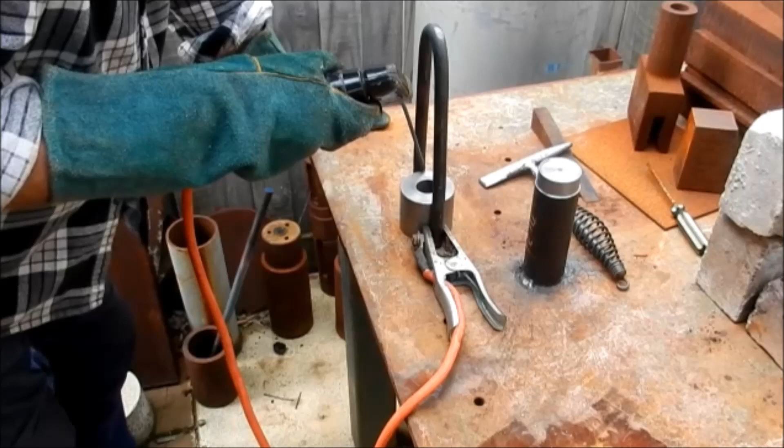Alright guys, Cam here at the Battler Workshop. I've got a little job I want to try and do over this Easter long weekend, and that is to move my Hi-Power lathe from this side of my workshop and remount it on this side of my workshop.

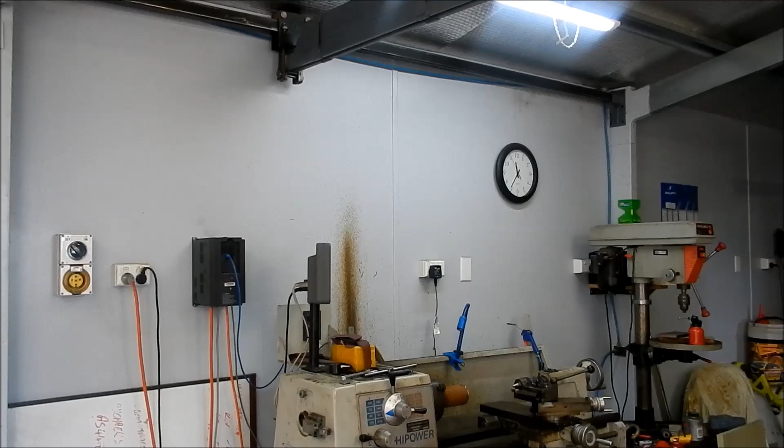The main reason for that is, in this bay I want to put a workbench, and above the workbench I want to put some cupboards. I've got a blank wall here that I can mount cupboards on, as opposed to this side where I have a window, which makes it more awkward to configure cupboards around. So it's probably going to be a lot easier to get the lathe over this side.

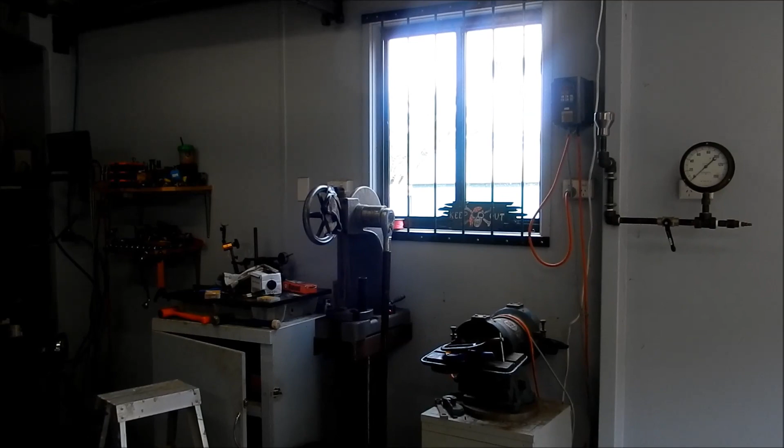And the other reason is, down the track I do want to get a bigger lathe and mount that in the middle of my workshop, and I can put a cupboard over here to share the tooling between the two lathes.

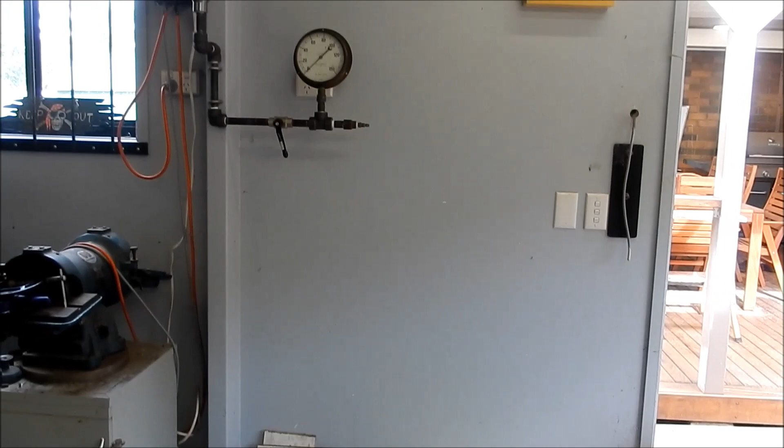So that's the task for this weekend, but before we start, I've got to make up a lifting jig to be able to lift the lathe from its bed, which is how we should always lift the lathe. Not from the headstock, not from the tailstock, we'll only damage it. We need to lift it from the bed.

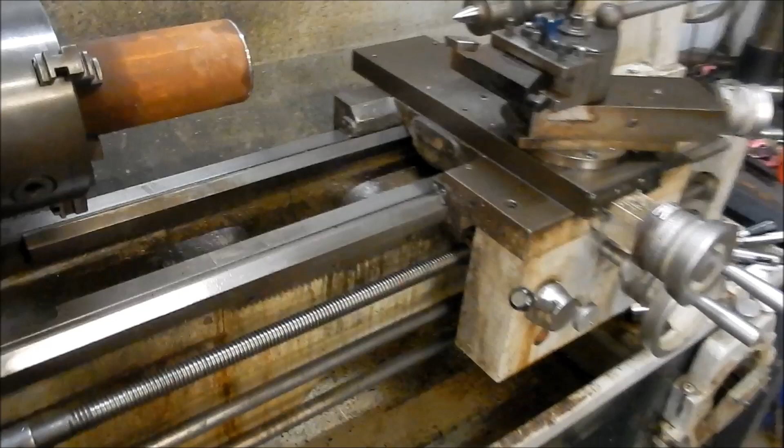I've got to put a support plate down the bottom with a studded thread and a lifting eye on top that I can use my brother's engine crane to lift from. So got a bit of stock in the lathe at the moment to make a start.

So let's have a quick look at the drawing and go over what we're going to be making up, and we'll make a start. Alright guys, we'll see you in a tick.

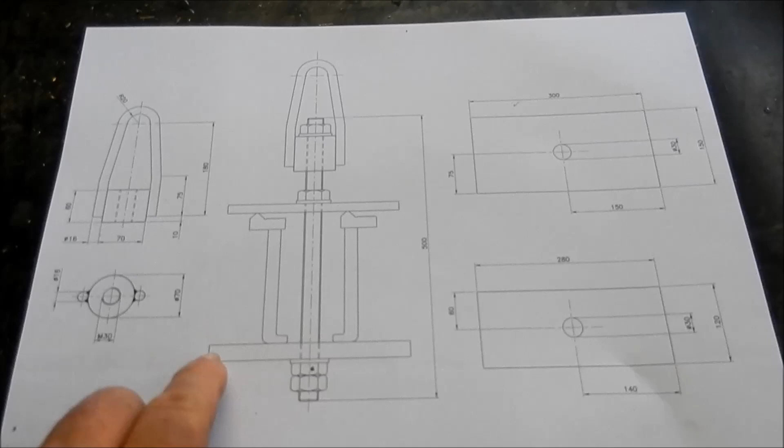And here's the drawing showing basically a general arrangement of what we're going to be doing, with the support plate underneath, a couple of nuts, jam plate on the top with a nut, and our lifting eye attached to a fabricated nut. So that's the details there of what we're going to make up.

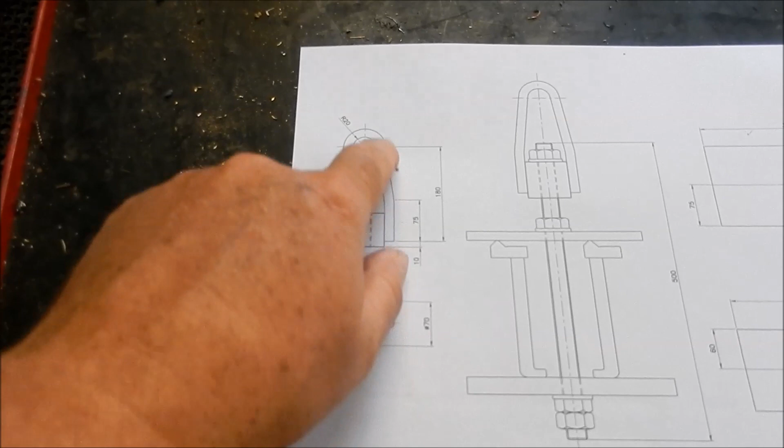So it's an M30 thread that we're going to put through that for the stud that I've got, and we'll fabricate up a lifting ring or a lifting eye with a bit of 16mm black bar, and then we've got the jam plate and the lifting plate to make up as well.

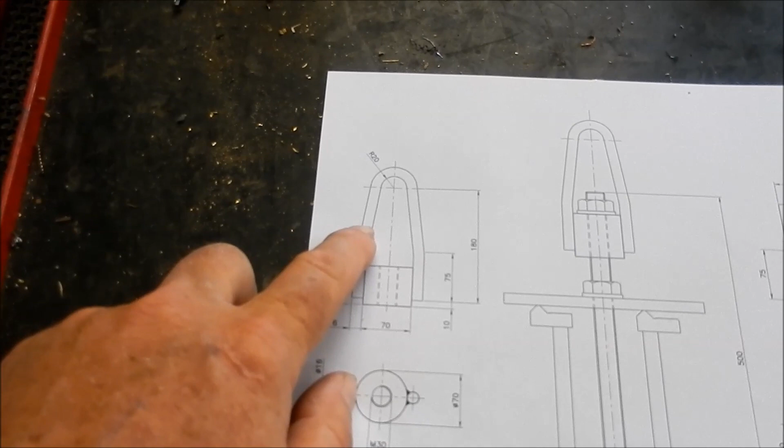The weak link in this, when I ran the numbers, will be the 16mm diameter black bar. It's a 250 megapascal tensile strength steel, and with one diameter it's capable of lifting around 5 tons. So we've got two diameters here, so that'll lift a maximum of 10 ton, and we'll put a safety factor of 5 on that. We'll bring that back to 2, so I can use that for the high power lathe,

which does weigh around about 850 kilo. And if I do get a bigger lathe, it's probably going to be around 1.5 tons to 2 ton. So I can use this jig for lifting on and off a truck or a trailer.

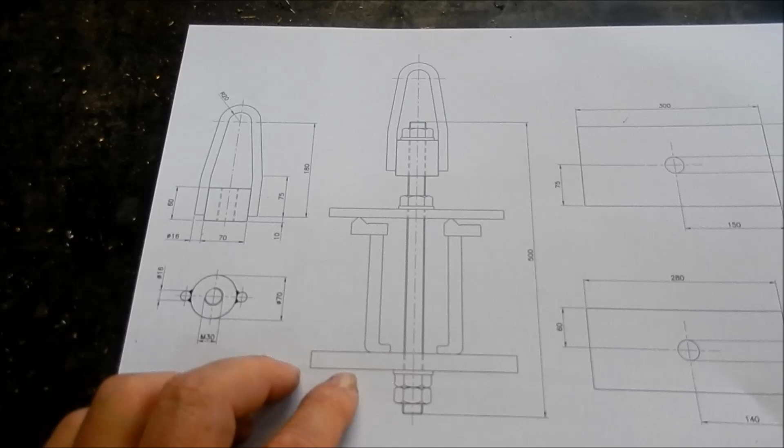Alright guys, as I said, we've got a bit of stock in the lathe at the moment, so let's make a start and we'll get into it.

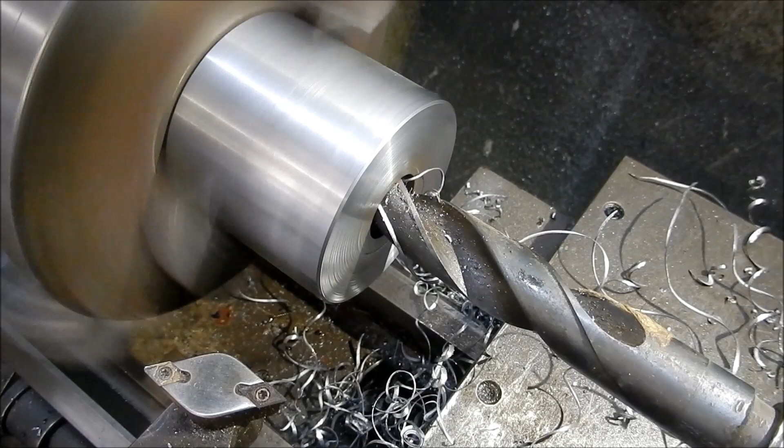Alright guys, this is one of the joys of moving. I've got everything stacked in boxes. I've got 5 of these big tubs, and whenever I want anything, I've got to try and find out which box it's in and then dig it out. For example, I'm after a drill here, and this was right down at the very bottom, so I've had to drag everything out.

I've had to do that with all my boring bars and my turning tools and all my bits and pieces, so yeah, a bit of a pain.

Anyway, we'll keep going. Like everything guys, this design's subject to change. I was looking for a fairly large threading bar I've got tucked away somewhere, and do you think I can find it? I can't find it anywhere. I've pulled everything out of boxes.

So in the absence of that, what I'm going to do is just drill a through hole that the M30 stud will fit up inside. Then I'll put a couple of nuts on either side of it, lock that in place, so it can slide up and down, and as I said, it'll be the nuts taking the load. I did want to thread this, it would have been a good little exercise, but I've got everything packed away and can't find the actual tool I'm after to do the threading. We'll go for plan B.

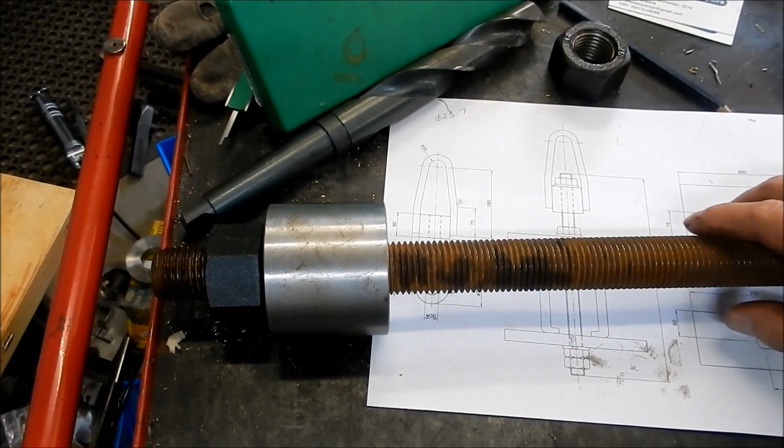Righto guys, so here's our change. I've got my stud steel here. This is an M30, high tensile. How do I know it's high tensile? Many years ago when I was working for a company, we were making up some lifting gear, and this is one of the spreader studs. When the job was finished, those got thrown out, so rather than seeing them thrown out, I grabbed them. So M30 high tensile, and that's capable of around about 40 tonne.

But I had to go into my local nuts and bolts place and buy some nuts for it, so we've got those. What we're going to do here is weld on our lifting ring, so I'll need to fabricate that up, and I'll put a jam nut on that side so it actually locks it in place. That'll do the job nicely, a little bit less work than having to worry about trying to cut the thread. It would have been a nice little exercise, but yeah, a bit hard trying to find the tools at the moment.

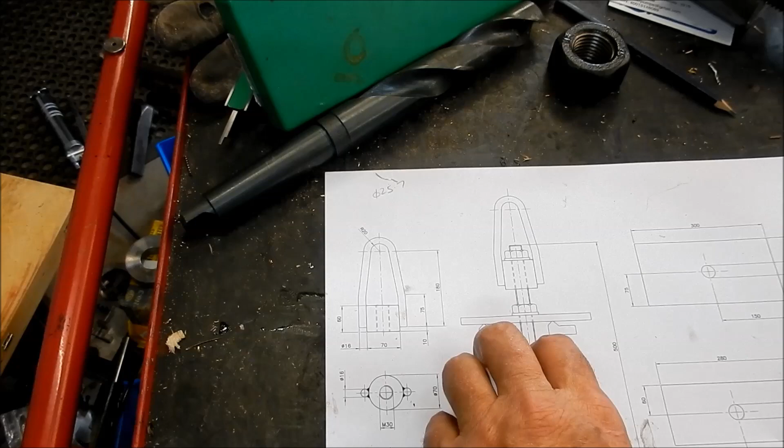All right, let's get into forming up this diameter 16 black bar, which is going to look like this, as we said. So I've got to make up some jigs to get that formed up. All right guys, we'll see you in a tick.

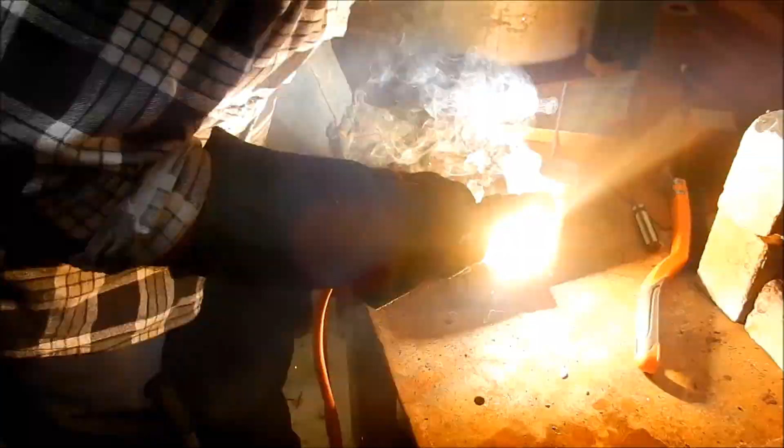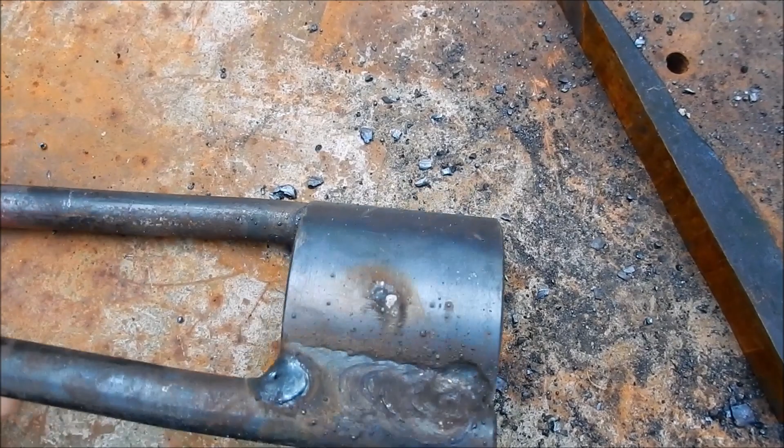Alright guys, that's finished off. I'm really pleased with how that has come up. Plenty of weld on there. Back when I was a young apprentice, I remember one of the old boilermakers telling me that for every inch of a 1/4 inch fillet, it can handle a tonne. So if I go by that rule of thumb, this shouldn't have any issues.

Alright, I'm going to get onto that with a flapper wheel and just tidy up all the spattery, slaggy bits, and we'll get these holes bored out for the plates.

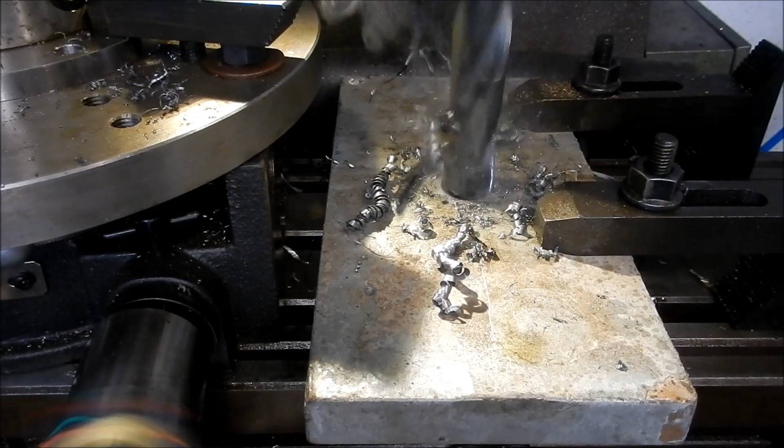Don't know what happened there. I've lost a fair chunk of my footage.

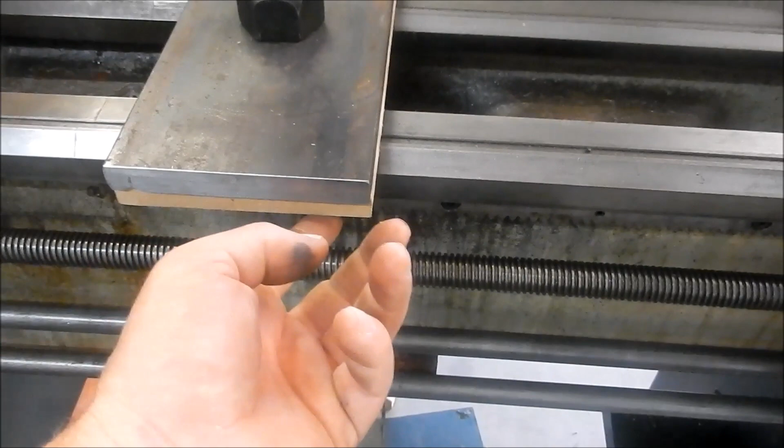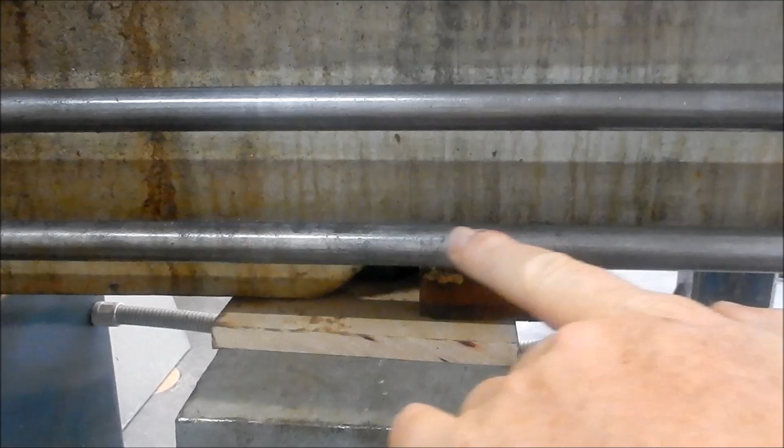Alright, I've moved the lathe, but I thought I'd quickly show you how this all assembled up. So we've got the top clamp plate, and what I've done is put some MDF underneath here just to protect the bed of the lathe when I clamp it up. Underneath, I actually had to move the stud a lot further towards the headstock to try and counteract that out of balance arrangement. So I've got a 40mm chock underneath there where the bed changes shape, you can quite see that. And underneath you can see the lift plate and the stud with the nut underneath it.

So it worked extremely well.

Alrighty, the next video I'll get some shots of the actual move, and wasn't straightforward, what we got there. Alright guys, we'll see you soon.